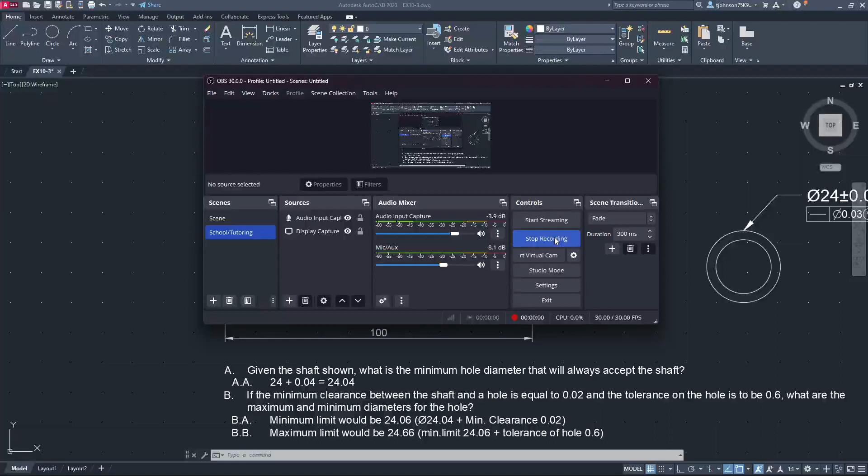But yeah, here are the answers. In case y'all are wondering, this is how I got them. I am 100% positive these are accurate and right, but to each their own. I'm going to explain how I got them.

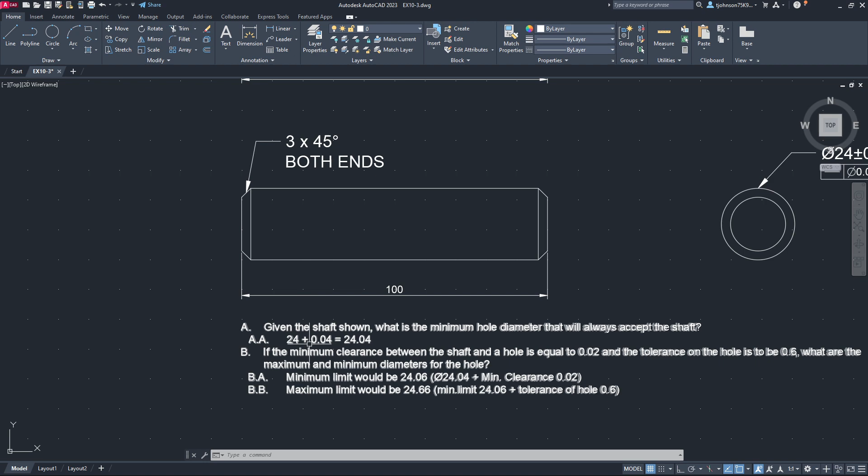So the question is, given the shaft shown, what is the minimum hole diameter that will always accept the shaft? Obviously, that's going to be the maximum limit of 24.04. Where do I get the 0.04? That would be this right here, this awesome thing right here.

So the tolerance, right? The diameter of this shaft is 24, plus or minus tolerance 0.04. So that just means the upper limit is going to be 24.04 and the lower limit would be 23.96.

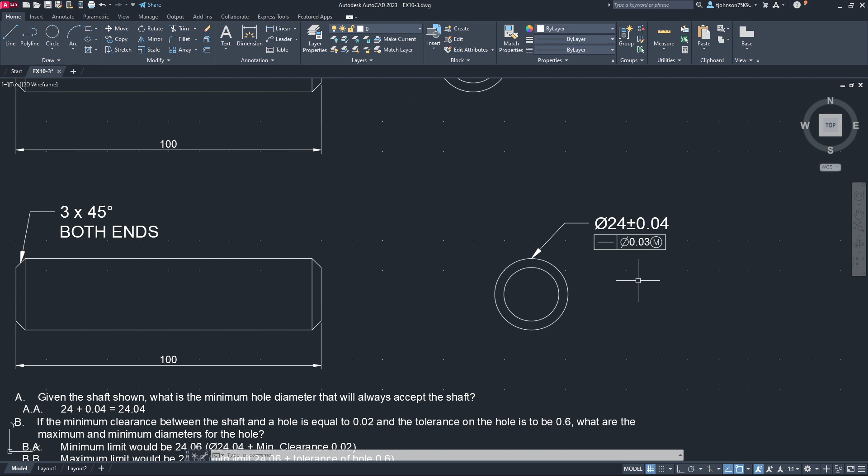Now we're going to move on to question B. If the minimum clearance between the shaft and a hole is equal to 0.02, and the tolerance on that hole is to be 0.6, what are the maximum and minimum diameters for the hole?

So you're going to take the maximum limit for the diameter of the shaft, 24.04, and add that to the minimum clearance of the hole, which is 0.02, and you're going to get 24.06. That is the minimum limit the hole should be.

Now for the maximum limit of the hole, you take this minimum limit and add the tolerance of 0.6. So, plus 0.6, that should give you 24.66.

And this is all in millimeters, in case you're wondering. But yeah, that's how you get it.

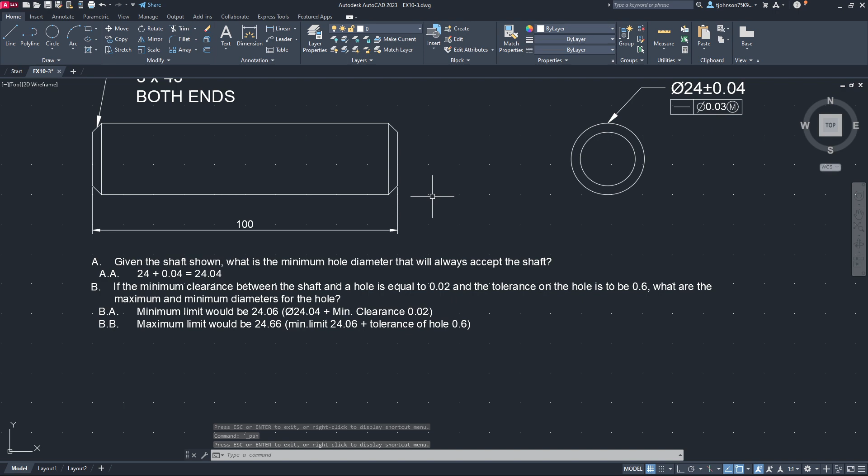Now on to the drawings and some slight explanation stuff. I was having some technical difficulties, and I actually drew this stuff like 3 or 4 times. This is like my 4th time making this video, and the audio is finally working.

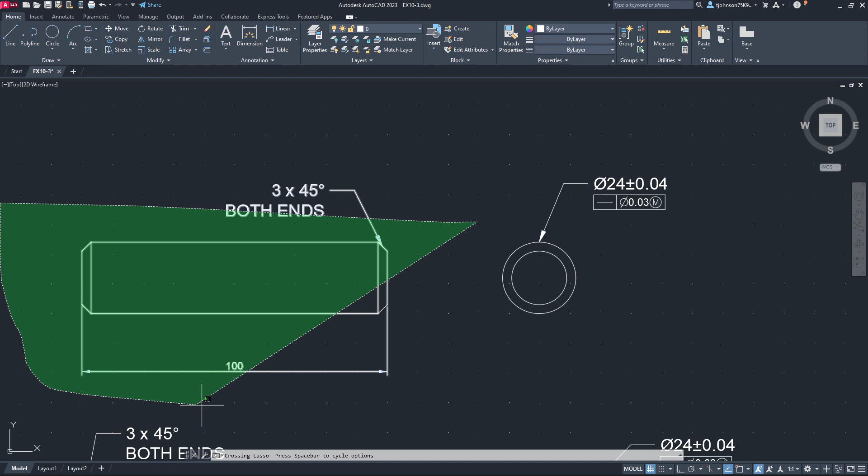Anyway, so you would start by making a 100 by 24 box, and then you're going to explode that box. This is explode, in case you're wondering. You just highlight it all, and then explode it.

And then from there, you're going to offset 3 on either direction. So you click offset, type in 3, hit enter, then click this line and click over, then click this line and click over, and hit escape.

So it's done. Then from here, you're going to click line, click on the corners, and go down. You're going to hit tab at any real distance — it doesn't really matter as long as you're beyond this line right here.

You hit tab, type in 45, and hit enter — or sorry, in this case it'd be like 135. And then the same for here, and over here it'd be 45 on either side.

And then I drew a line out from the center of this, like right here — bam, that's center — and then I just took it out there and hit escape.

So now you have a center point. You click on circle, hit diameter, find your center point, which is right in here, and then you move it out to 24, or just type in 24 and it'll do that.

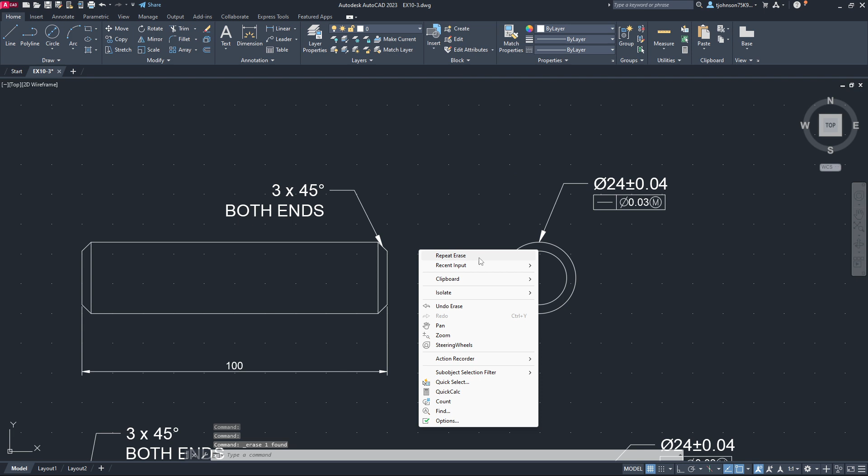And then you draw another line — erase, then line. You're going to draw a line out in any random direction. You hit tab, hit 0, and do that on both sides, this one and that one.

And then what I did is I did annotate, center mark. You click that, so it gives you a center mark. Now you have intersection points of the lines that you would have.

So you go back home, click on this, and you're going to hit the 2 point. You would just click that point and this point, and that would be your circle. Now you're kind of caught up to where I'm at.

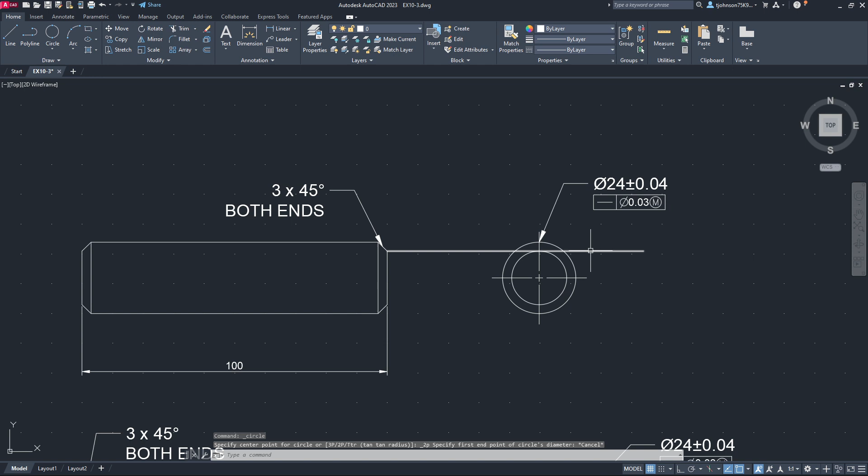So we don't need that stuff anymore. Here, we're going to draw a leader. Since we're at home, under the home tab, annotation side, you can click the leader, and you're going to click wherever you want and just draw it out here.

And then from there, you're going to click on symbols, click diameter, and type in 24, then click the symbol again, plus minus, and then you just put in 0.04 and click out.

And then how you do this — this is the major thing that everybody's kind of confused about. Click annotate, let me see if there's one here. Nope. Alright, so under the dimensions section in the annotate tab, click that drop down menu and click right here — it's tolerance. So here are the symbols.

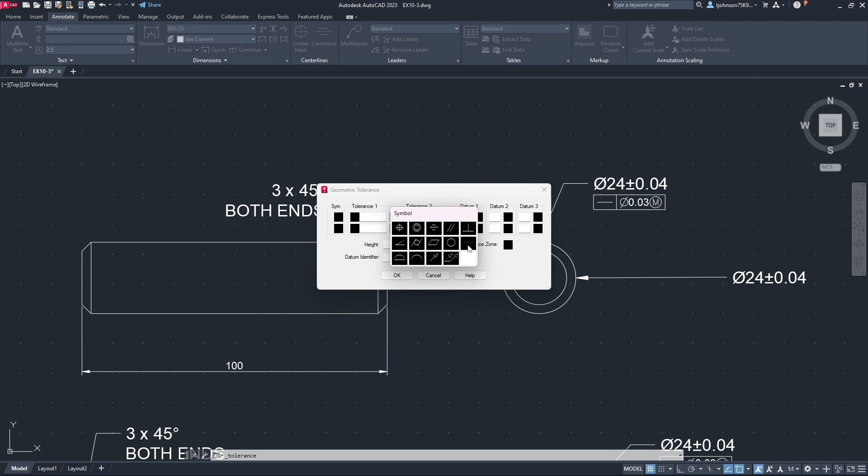But anyways, so that's it. So we're gonna go click on straightness. You can find that on page 479 in case you're curious. So what you'll do is you'll click this right here. This is the diameter symbol.

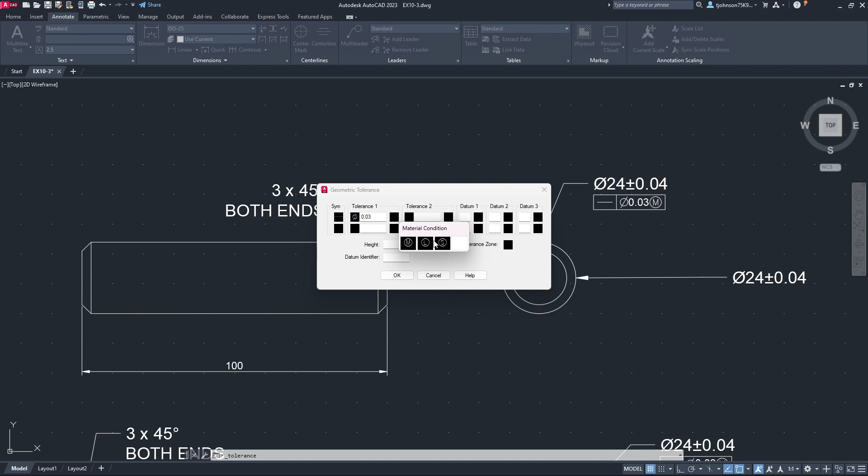And then you're going to type in 0.03, because that's what it is. All right, and material condition: this is maximum material condition, this is least material condition, and this is regardless of feature size. So that's cool, I guess.

Yeah, some nerd decided this is how it is all going to go down, and so that's how it is. And by some nerd, I mean the American Society of Manufacturing—or no, sorry, Mechanical Engineers.

Yeah, anyways, and then you just kind of click that underneath. That's awesome, cool stuff. Next is go back to home. You just click on leader, and then you'll click wherever, take it up.

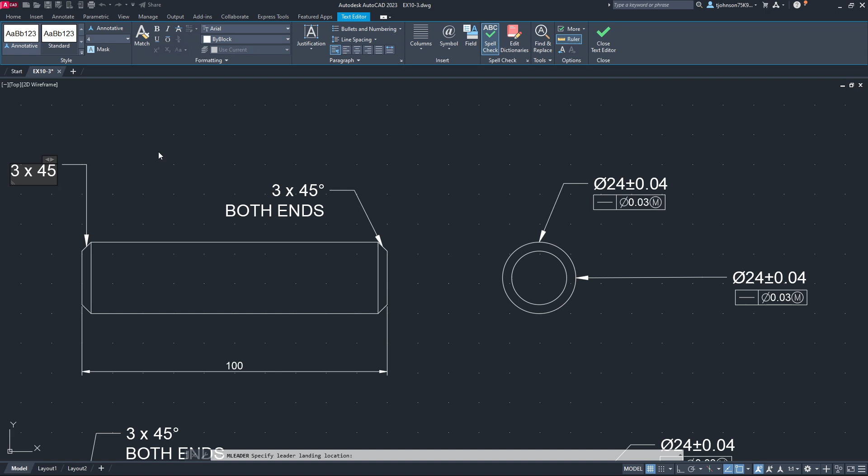And then you type in 3, space, X45. And then you'll go up here to symbol again, click degrees. Then you're going to hit enter and both ends.

All right, let's see. Boom. Cool. And you just click out. And so you have that all done. Super simple, super awesome.

All right, so since that's all handy dandy and done now, oh yeah, just make sure you put this little dimension in there too. That's super easy—you can do it with this. Just click that, and then that point, bring it down, click, and you're done.

All right, so yeah, that was a quick run-through, so now you have the answers for that. I'm gonna do a little bit more. I'm gonna tell y'all why tolerancing is important.

It's because... I'm pretty sure that wasn't explained in class. I wasn't there, but I assume this is not something that's been gone over.

So AutoCAD, when you put something in here, it's perfect, right? So like this is perfectly however long it's supposed to be, the right amount. It's supposed to be 24 in diameter from this point to this point. In real life, unlike a computer system, nothing's ever perfect. So this is perfection, and in real life it isn't.

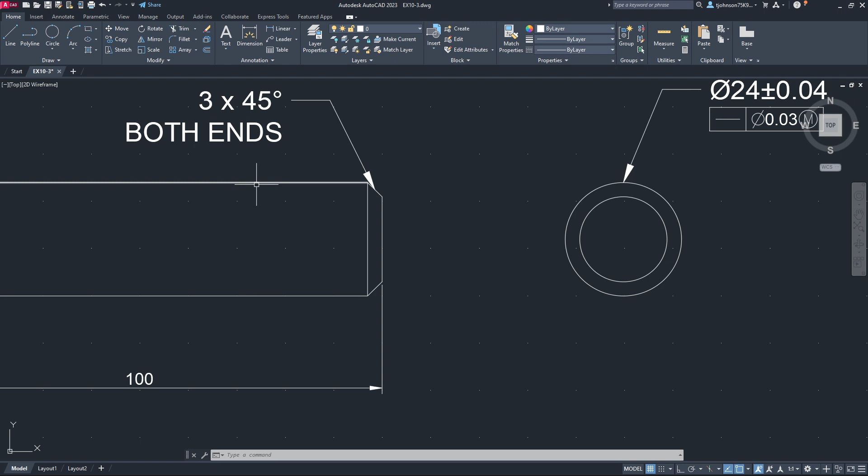Well, based off of how well this material was manufactured to be that sheet metal you're cutting into, you could have a rough edge—like a rough cut. You're always gonna have a rough cut, because the tool that's cutting this shaft out is literally another piece of metal, and it's just metal on metal grinding it out at a high rate of speed. So this is not a perfectly flat surface—it's all going to be jagged and rough and just crazy, right?

So that's where the tolerancing stuff comes in. A bunch of nerds got together and founded the American Society of Mechanical Engineers. I'm sure somebody's crying about what I just said, but you know, it is what it is. I don't care. But yeah, and they made the standards for all of this stuff.

Which is ASME standard Y14.5. That actually could be updated—I'm just going off of what I learned—but it's dimensioning and tolerancing, basically the ASME standard. So that's where you get all of this stuff: the symbols, the tolerances, characteristics, and the terms. That group of nerds got together and made it happen.

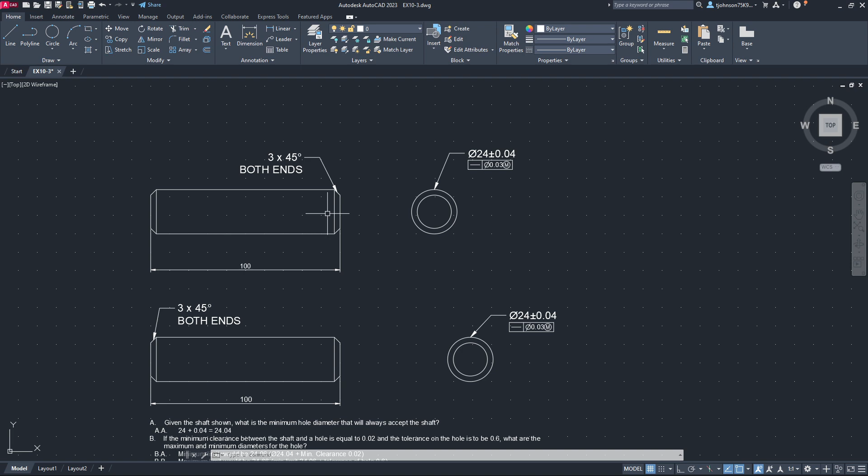Imagine this is wood and you're building a shelf. This right here is trying to find the minimum limit for the holes, how much those holes have to be. So when you have your shelf, you need to make sure this shaft, like a little dowel rod, that holds the shelf in place, fits inside of that hole. I'm sure most of you have built something similar. So tolerances give you plus and minus lateral limits to what it needs to be so everything fits together properly.

And the reason that's so important is because it greatly reduces fitment tests, and it saves time and money in a manufacturing process. If you create tolerance limits in advance, before moving into the actual process, it eliminates a lot of the guesswork, and it's going to reduce waste.

A lot of us have taken the Lean Six Sigma course by now, so you're always trying to reduce waste and increase proficiency and efficiency. You make it a continuous process, and if you're just doing basic guesswork and trial and error, you're literally making a shaft or cutting a hole and trying to fit that shaft in that hole and being like, oh, it doesn't fit.

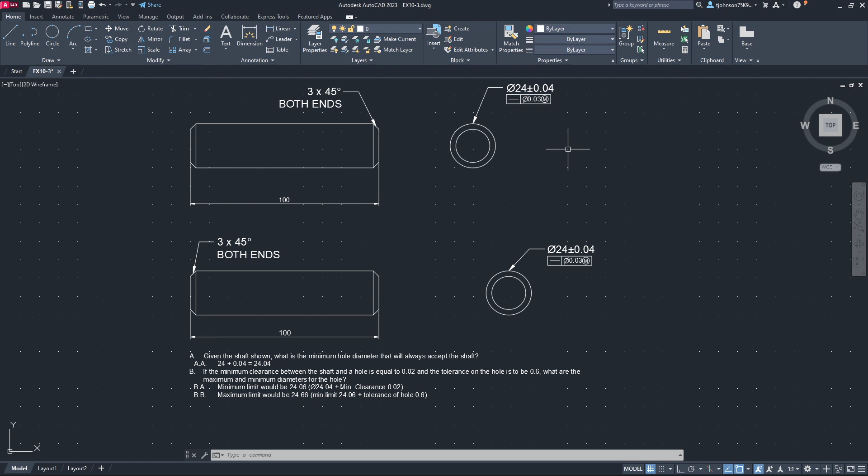But in any normal manufacturing line, you're trying to reduce costs and churn out as many as possible. So that's the whole reason behind tolerances and why they're so important. That's the nitty and gritty. I could probably explain it a lot better given more time, but yeah.